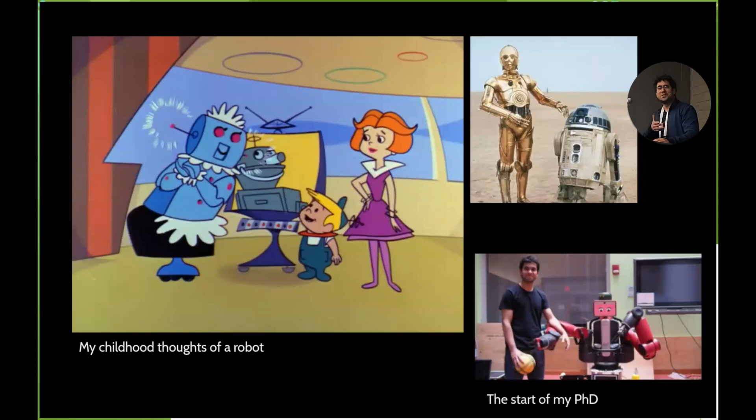This is the robots I grew up with. This is my first robot as a PhD student, the Baxter. Not the greatest robot, but it's amazing to play with, easy to break and fix.

And this is years later with master students working at a deadline for ICRA. They were recording to show their family that it was finally working. This is 4 a.m. at the deadline, I am dead asleep, laughing because they're making jokes about the theory. At 4 a.m. they were recording to show the family, and it's Bavaria, so it was actual beer.

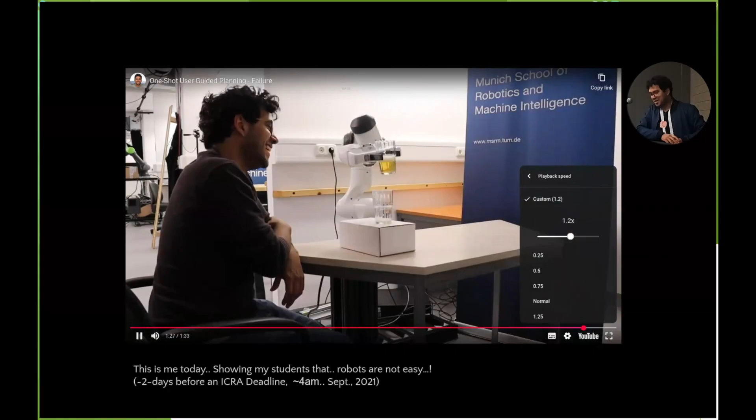And yeah, it's just to show that when you come to physical human-robot interaction, it's not that easy. Human-robot interaction, then you add the human part, and you make it a little bit more difficult.

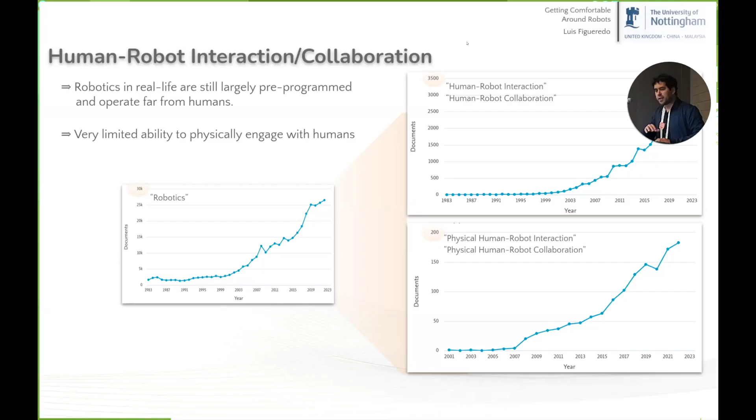So where does it come from? It comes from the fact that it's a completely new field. When you compare with robotics, these are the graphs for robotics, and you can see the numbers on top, talking about 30K papers per year nowadays. And I'm sure this data is 2 years old, so it's way more than that now. When you come to human-robot interaction, we're talking about something that just started in the 2000s, and physical human-robot interaction about 15 years ago. So we're still in the early ages of the field, and getting everybody to join because it's a very exciting one.

So how do we make this connection, how do we make robots more reliable so that those scenarios don't happen? Don't draw beers on your supervisor, that's a start.

So the basic features, the safety layer. When you talk about safety, the first thing that comes up, of course, is cognitive safety, there are many aspects of safety, but the most critical one is physical safety. So what happens if you have a collision? This is well known, decades of years of collision studies, hundreds of years of collision studies, we know that there are 2 phases that we can control.

We can control the pre-collision phase, which is basically like imagining yourself driving a car, what you do is brake. This is one of the scenarios we could do. With manipulators, I'll show that we can do a little bit more than that. During the collision phase, it's just transmission of energy, that's where your car crashes, there's nothing you can do there. But there is something you can do after the collision.

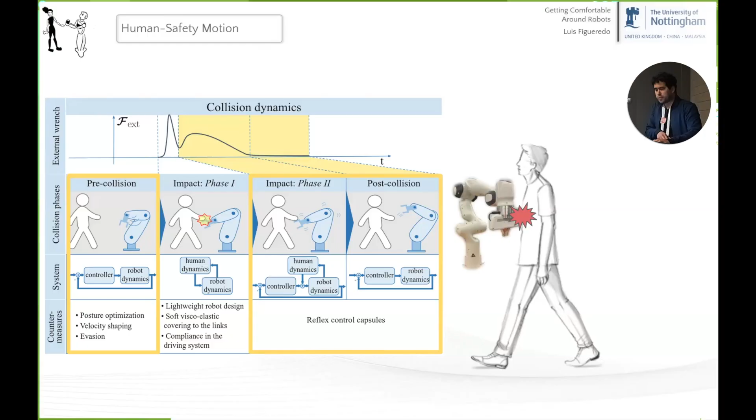So I'll talk a little bit about those two. In the pre-collision phase, what I was mentioning, velocity shaping is the most standard approach. You just reduce the velocity, you reduce the energy. That's very trivial, and of course it depends on the material you have, the curvature, whether you have a knife or rubber around you, that's completely different.

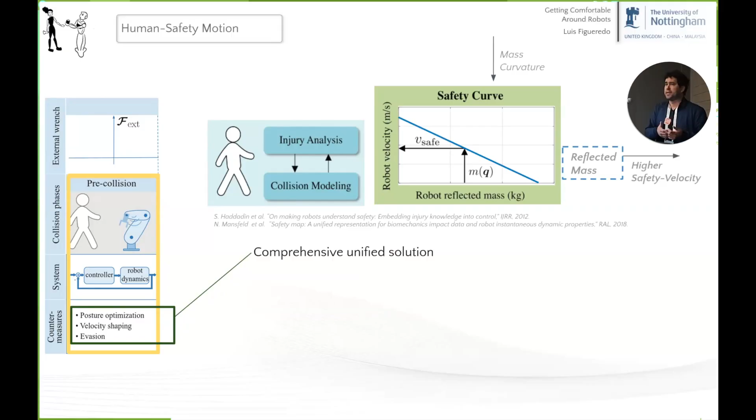But the other thing you could do is adapt the reflected mass. Think about yourself as a boxer. As a boxer, you try to maximize damage, so you have a behavior, a posture that maximizes your reflected mass. As a robot, you want the opposite of that. You want scenarios where you have lower reflected mass, because if you have lower reflected mass, you can have higher velocities.

And this curve in the top right is just a reflection of that. If you consider what are called safety curves, without going into too much detail, it's basically the relationship between the velocity you can have that is still safe, according to the reflected mass that you have. Here you can see if you have a lower reflected mass, you can go faster.

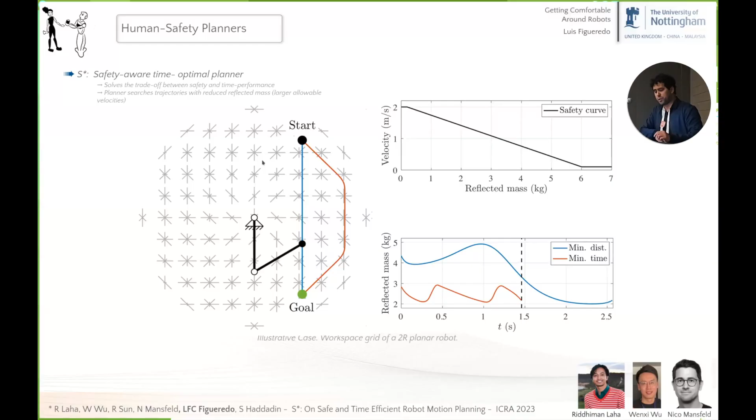So we embedded that into different planners. This is just an example of a modified A-star, that instead of having the heuristic based on distance, we have the heuristic based on time, the transition time, the safety transition time.

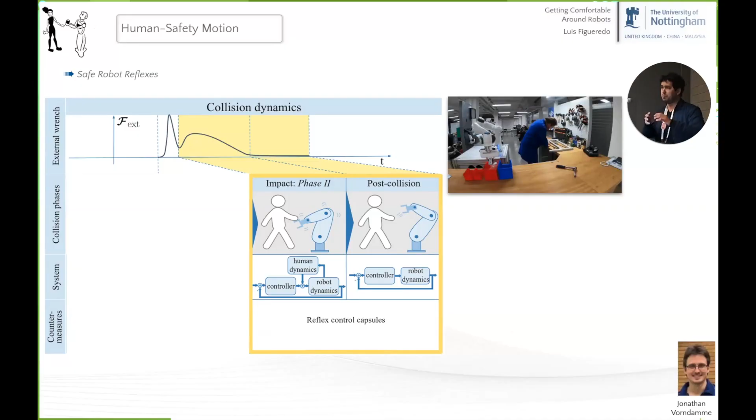Now I'm going to talk a little more about the other side of the challenge, the post-collision phase. Here we'll talk about reflexes the robot can take. This is an example: there's a collision, the robot contacts the person, and it triggers this super zero-G behavior that removes all the reflected mass from the robot.

So here, what we did first was design a taxonomy. We looked at previous studies and mapped out different scenarios in human-robot interaction that could cause safety issues, building up a massive taxonomy involving objects, the human, collisions, contacts, and objects in the scene. With that, we can define what kind of reflex we can play with.

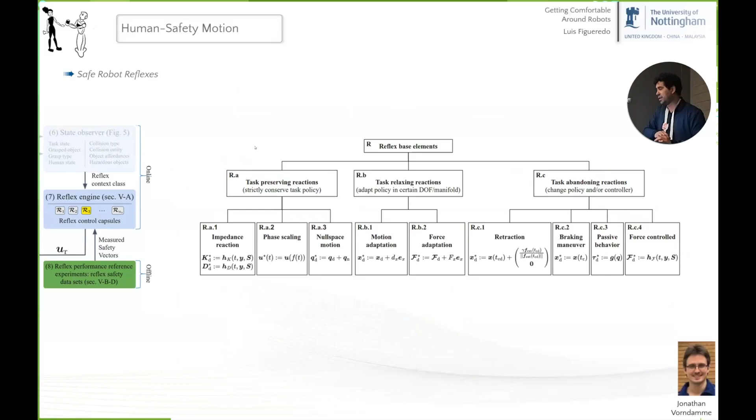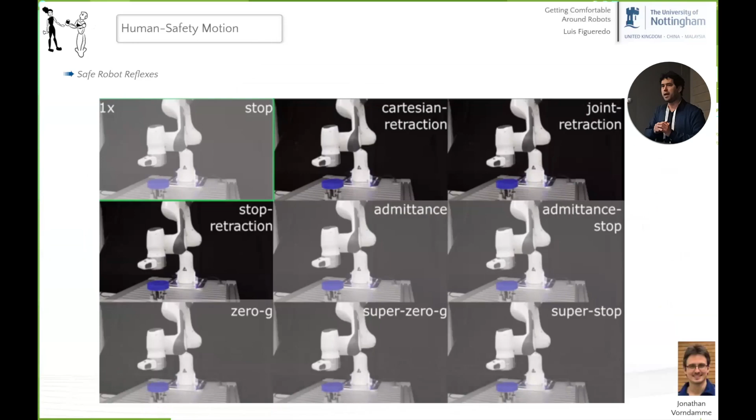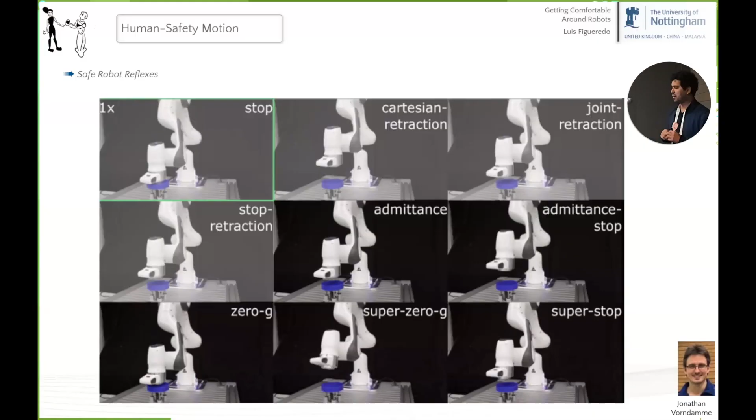And for the reflex, we also experimented with different reflex agents, so let me go into a bit more detail. Here you can see roughly three categories and the behavior they have whenever they collide with sensorized objects, a device for measuring contact forces. You have stop collisions, active retraction reactions, which could be Cartesian, joint retraction, or a combination of them, and methods involving back-drivability with admittance, combinations, zero-G, super zero-G, and different combinations of those. You can see that they're quite different — here they are in slow motion.

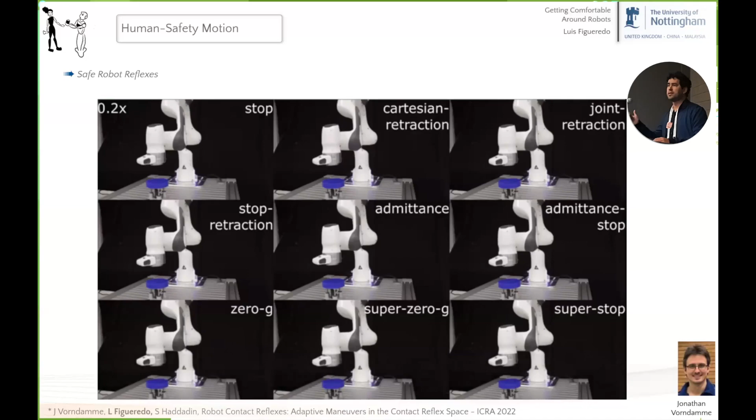Here you can see some features that are different. The forces are different. You can clearly see that the velocities after the contact are different, and the distance they travel is also different. We also investigated secondary collisions.

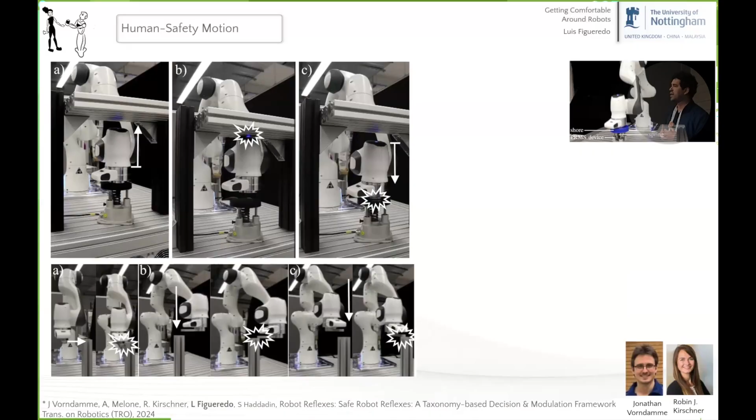So whenever you collide with an object, what happens in the second stage, and what kind of forces are transmitted. We took all these features and consulted experts in safety and biomechanics, colleagues who have worked on different topics in the area, including in vivo studies, to evaluate the different kinds of hazards you can have.

So we evaluated, for instance, clamping, and what features are related to the damage a clamping could cause — the maximum force at the point of contact, the distance traveled, the secondary collisions, and the velocity the robot and the reflex agents have during those secondary collisions.

And now you can look at them and very easily decide. It's a decision tree that you can say, oh, those are not good, I can use those for that specific scenario. And here's roughly what you got.

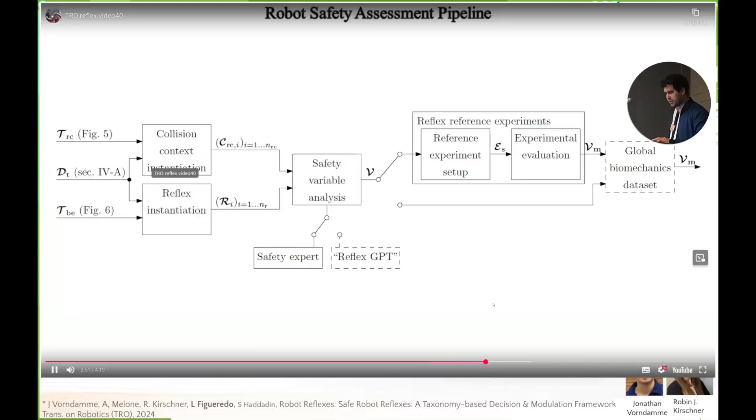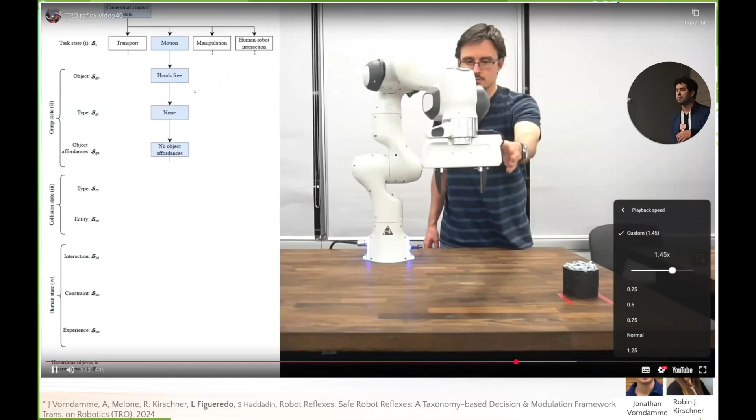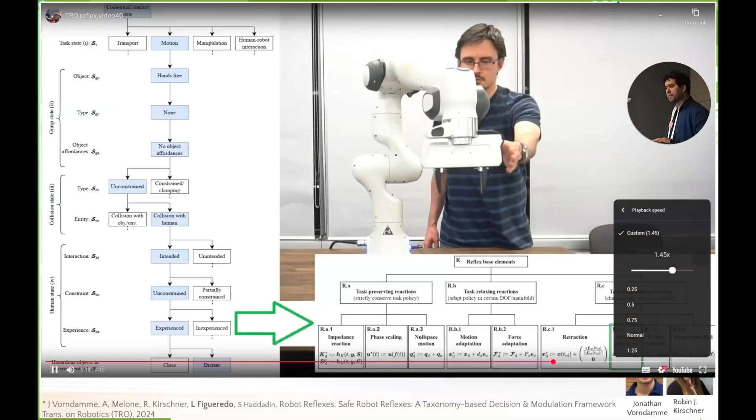This is a very simplified scene where we have some contacts, so I'll just speed it up to make it easier. Here you have some contacts. You go on the taxonomy, evaluating, and here, naturally, stopping is a very safe criteria. Stopping is the standard one, it's the one that is certified, and it's the most commonly used one. I'll just show why it's not ideal.

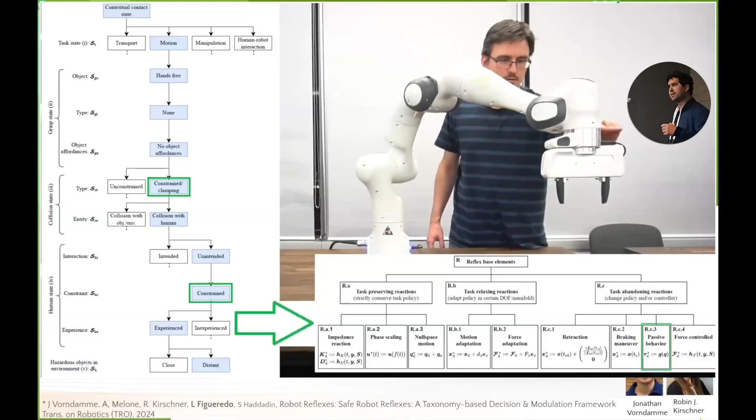So you have a secondary collision now, which stopping would cause clamping. And this is the taxonomy. Now stopping is not a valid condition. Super zero-G instead is a valid one, so the robot becomes super light and the person can move.

In this case, a stopping criteria is again okay to have because there is no chance of clamping. All the reflex elements would also be safe for this scenario.

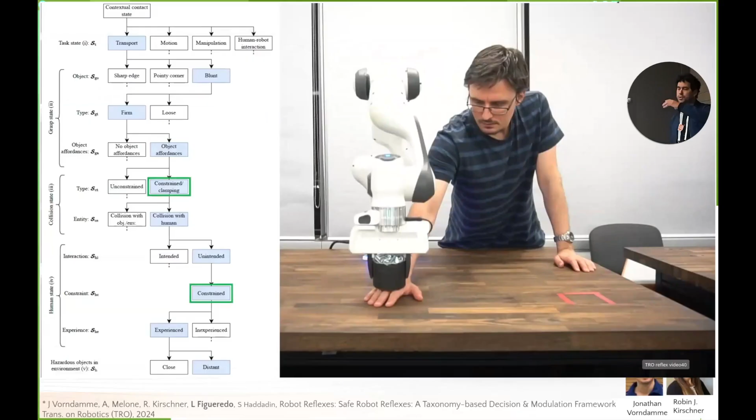And finally, there is another scenario, but this time we cannot activate the super zero-G that we had before. The robot cannot just go flying around because it has objects, it's carrying something that could be a hazard. So now we have a hybrid condition, could be an admittance controller, but this is a hybrid impedance controller. This is the kind of behavior you want to have to ensure human safety.

But now, you can ask if this is indeed safe, and I'm just gonna make an anecdote so it's clear - I'm Brazilian, so I go to football. Whenever I show this, I always tell how, a long, long time ago when we had an amazing team, we had a manager who told our best player, in the '58s against the Soviet Union, this is the plan: you dribble the first, you dribble the second, you go around the corner, you score, you touch the ball, you score. And the answer of the guy was, great for the manager, but have you already talked to the Russians? It's just like that - someone needs to talk to the robot, right? Otherwise we have an amazing plan and this kind of behavior.

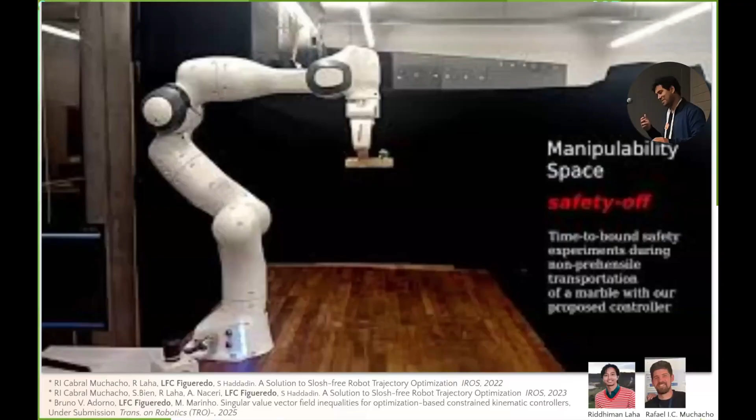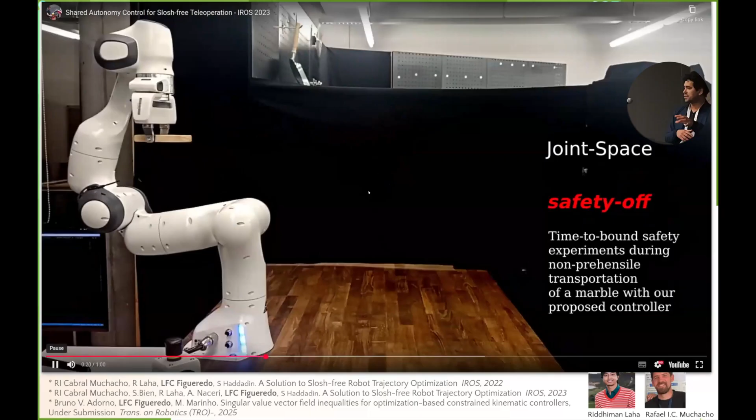Which, yeah, it's not ideal. So we need to embed those safety features in the robot. The robot needs to behave exactly as it is intended to. And these are the safety features that you embed in the robot, the most critical ones, of course.

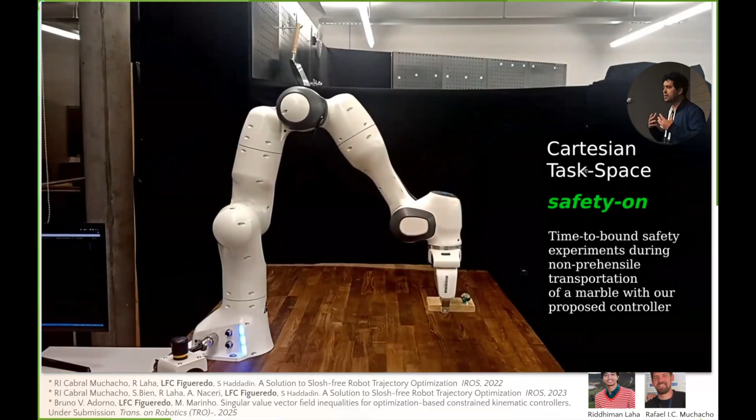You have the joint features that need to be there, so the Cartesian space constraints that need to be there as well, and manipulability constraints that need to be there. So all those are safety guarantee features that need to be there such that the robot can actually be safe. Otherwise, you can have the perfect physical safety guarantees, but if the robot doesn't behave safely, then what is the point?

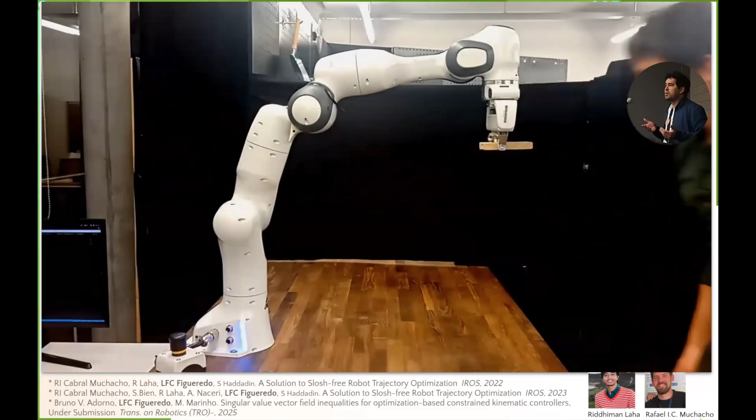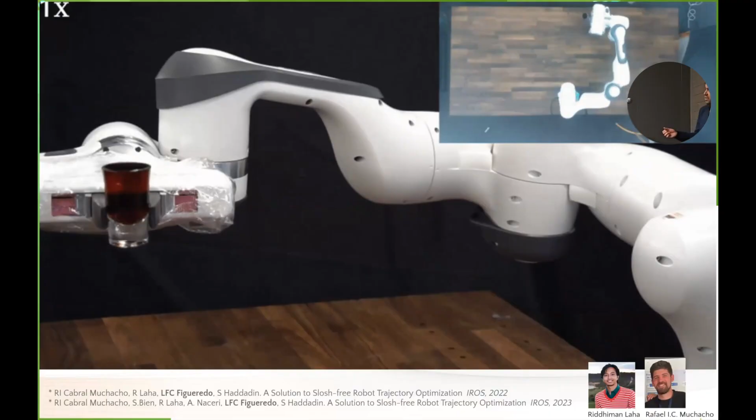So we took those concepts and moved to kind of a play scenario where we are looking at what could be extreme. One of the hardest challenges in robotics is carrying liquids, right? So how can you make those scenarios feasible? You really need to have precise manipulation. You really need to have controllers that guarantee the conditions we are planning to have.

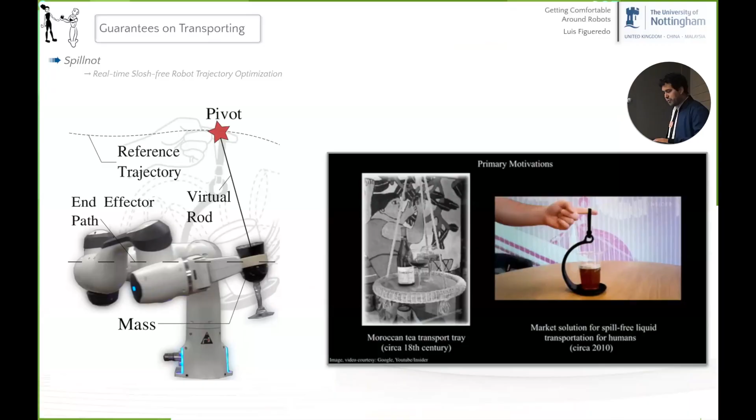And this is basically emulating a spherical pendulum. This comes all the way from 300 years ago, Moroccan tea tray devices - we just modeled the robotics like that. And we ensure the robot has amazing behavior to behave like that, so it doesn't drop any liquids, because it's all model-based, and these safety layers need to be model-based because they need to have formal guarantees.

We embedded - these always running at 1 kilohertz - an MPC controller. It's basically a controller under constraints as well, and the time-bound constraints basically guarantee that the dynamics of the pendulum that we have are also matched by the dynamics, the constraints of the robot that you have.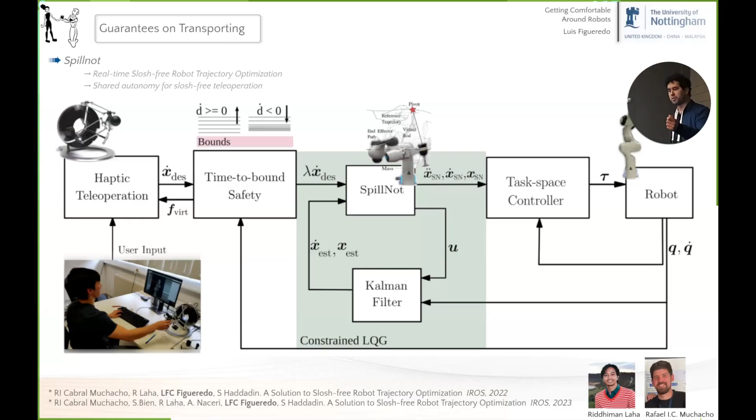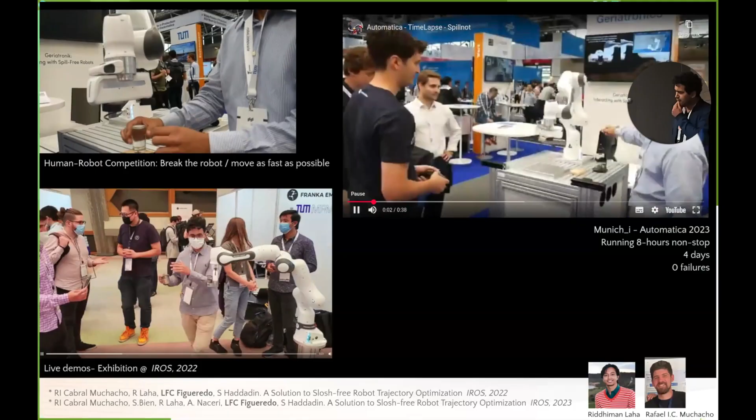And with all this running in a loop, we let people play around. So this is at IROS in Kyoto, and you give the cell phone to control the robot, and you're asking people just to break the robot. And this is a cool thing that the safety features need to have.

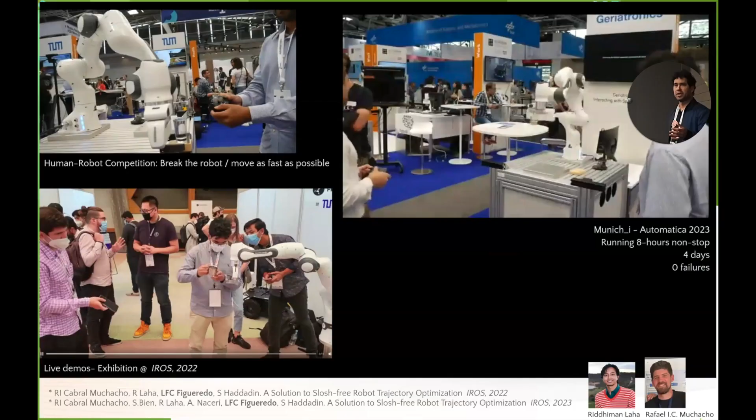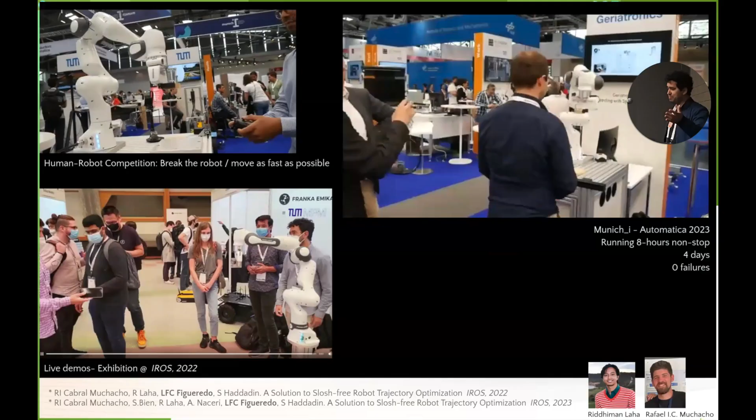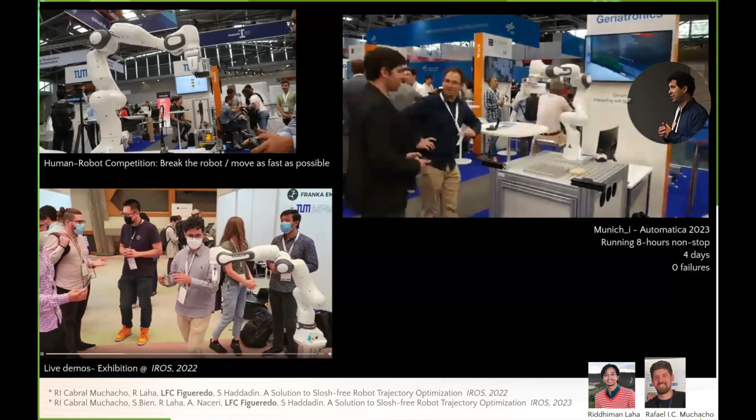You need to ask people to break things, because this is where it cannot break. In all those scenarios, this is in Automatica, in two different scenarios where you have like 40,000 people, you're just giving the Xbox controller for people to play and break the system, and giving it to kids to play or break the system, which is extremely scary. Kids are very good at breaking things.

And it worked, that's the main thing. So that's what we wanted to have in a safety layer scenario. If you have that in the safety layer scenario, then you can build up.

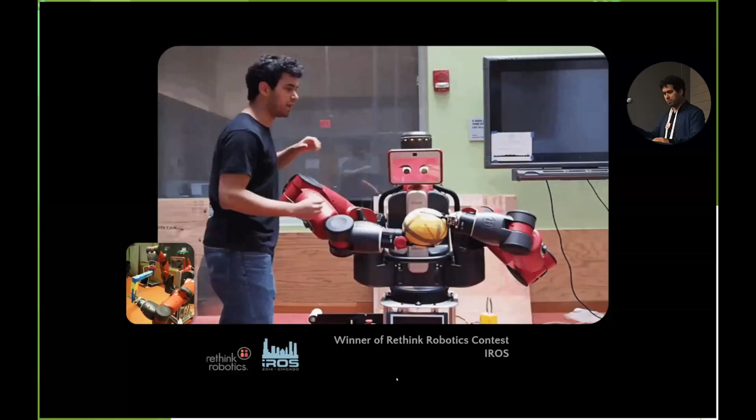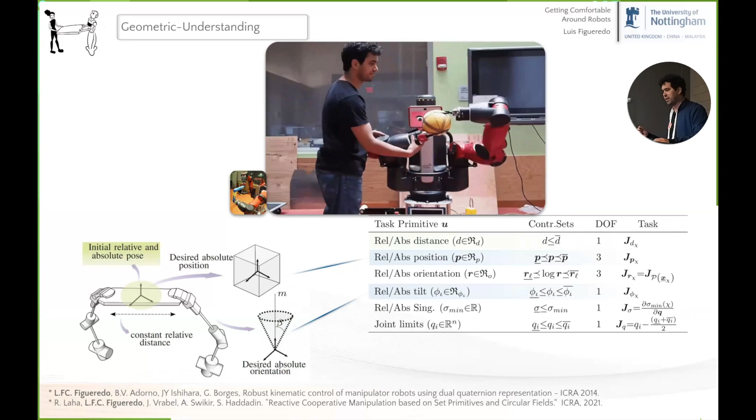So here I'll talk very quickly about the understanding and reaction scenes. This is basically me trying to break the robot as well, showing a little bit about the reactiveness that the robot needs to have. I'm just trying to drop the ball, and the robot needs to react instantaneously to adapt for it.

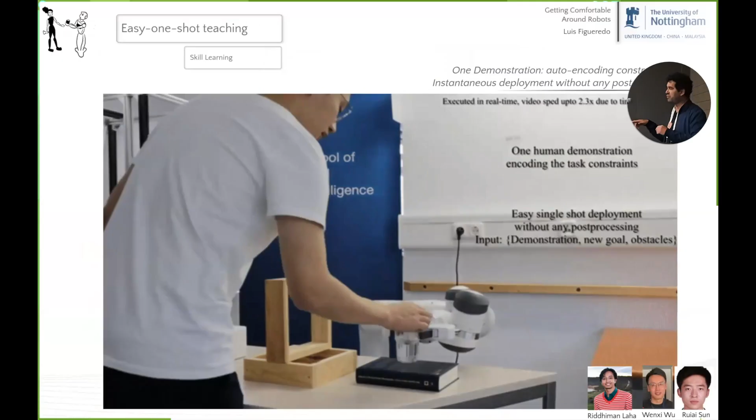This is the scenario of teaching tasks, again teaching one demonstration with all the safety constraints that we had embedded before. And this is the same thing where they dropped the beer on me, but now without dropping, ideally.

And extending to different scenes. I'll go very quick on that topic because it's not the main idea, but the idea here is basically that once you have the basic constraints, the basic feature, the layer of the robot underneath, then teaching becomes easier and much more robust.

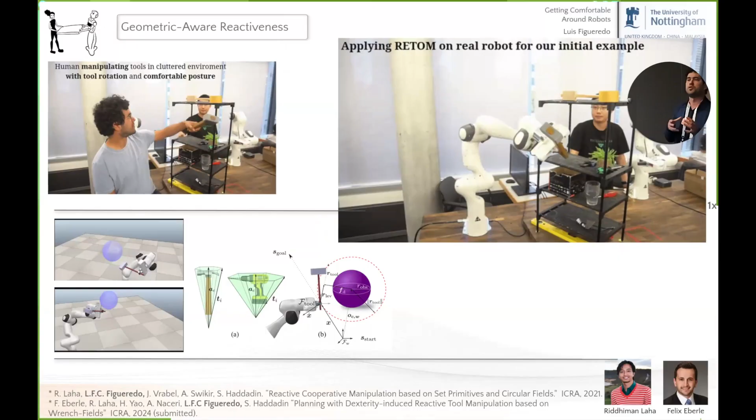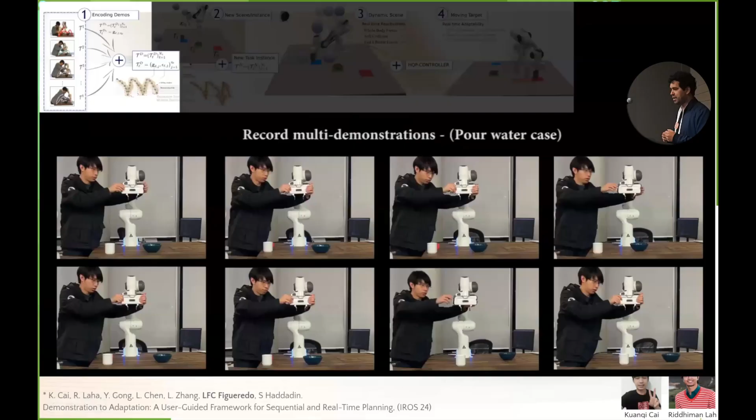This is an extension where you adapt also the reaction, the whole body adaptation of the robot in different demonstrations. But again, it's just the idea that if you have those safety features, then all this becomes much simpler to use and much more robust.

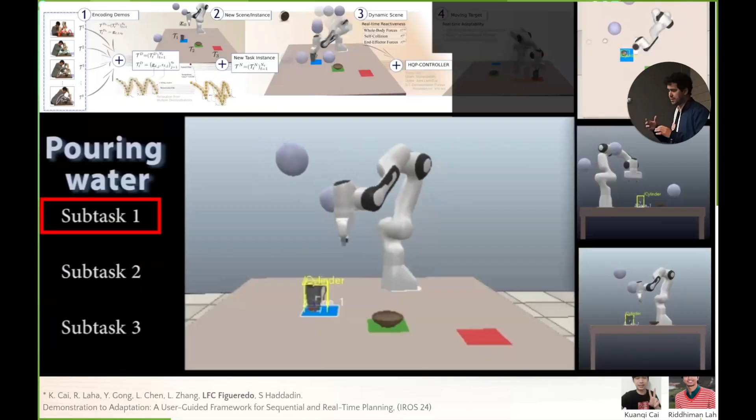And this is a whole body avoidance, while tracking and executing the demonstrated task.

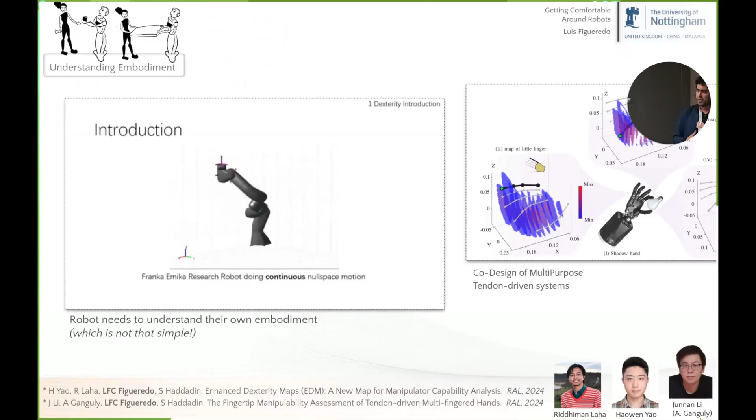I'm going to go in a little bit more detail on this. I just want to highlight why this is important, understanding the robot embodiment as well, because we need to understand the human embodiment and tools that we can use for one, we can use for the other.

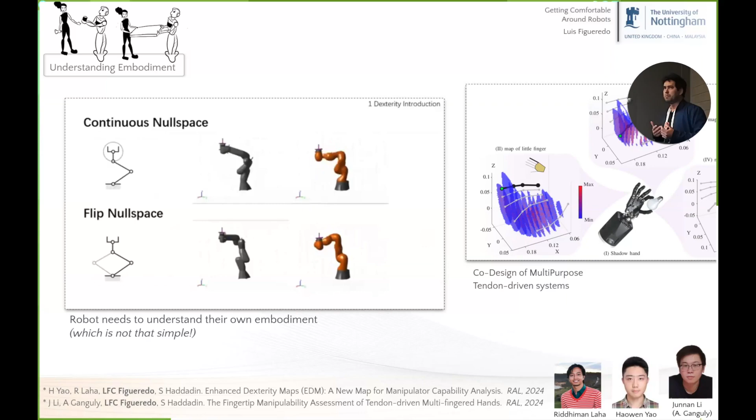So this is a study we are looking into on the embodiment of the robot, particularly switching between robots. If you have used, for instance, RRT, you know that sometimes RRT just takes completely different paths. One of the main reasons for that is because it has discontinuities in the null space.

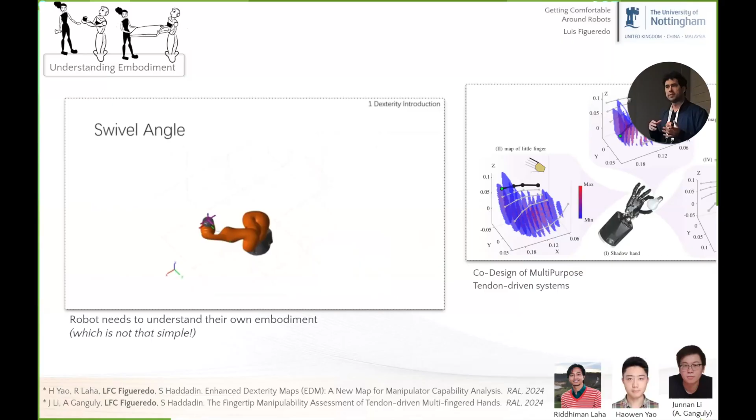So we evaluated not a 6D robot in this space, position and orientation, but an 8D scenario where we have the swivel angle and the switching between different parts, the discontinuous parts of the robot. We found that different robots have different ones.

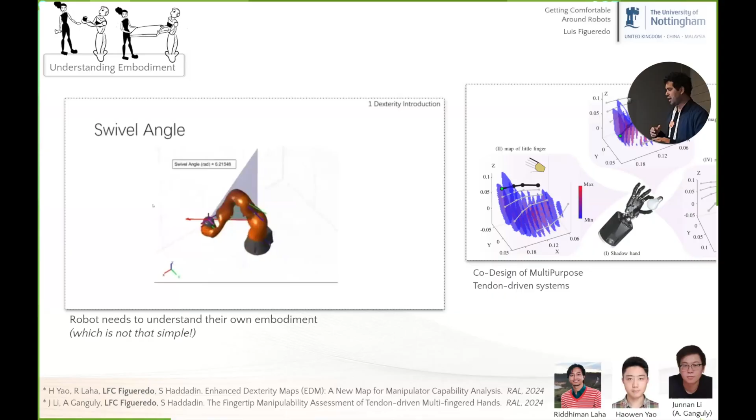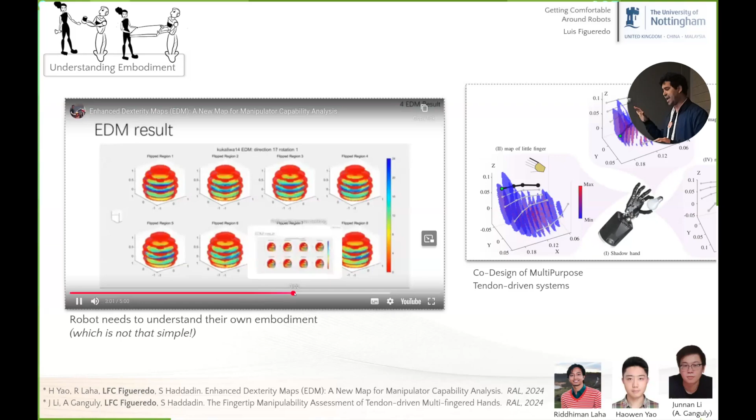I'll just jump here to what you see. So here are the KUKA discontinuities, which are continuous across 8 spaces that the KUKA has, and the Franka Emika has 4. So if you know about them, then you know how to switch between different parts of the space. And if you guarantee that your RRT is moving in a continuous space, the behavior will be continuous.

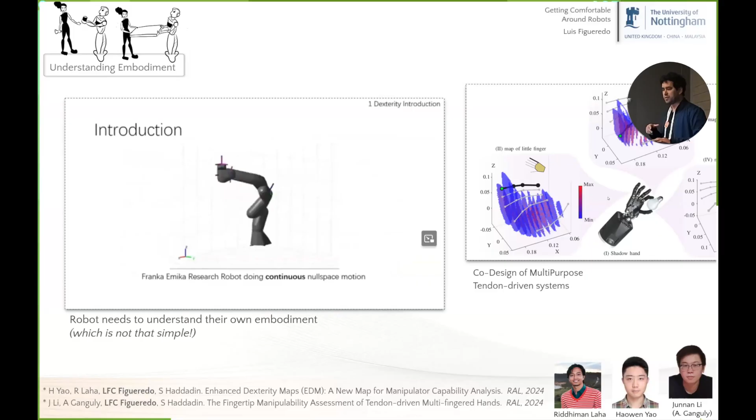I'll go into a bit more detail on that, but here the idea is that these maps, this information, can be used not just to build new devices, new tendon-driven devices, but also to understand human embodiment.

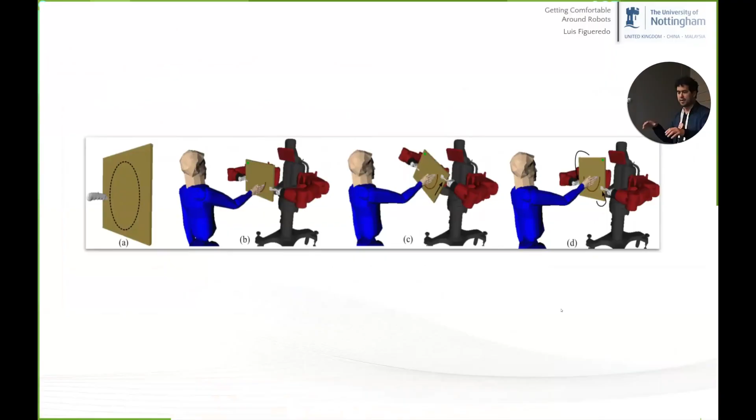All right, coming to humans now, you have all these layers set, and now you want to have like a complex task together with the human. So here you're doing a physical interaction.

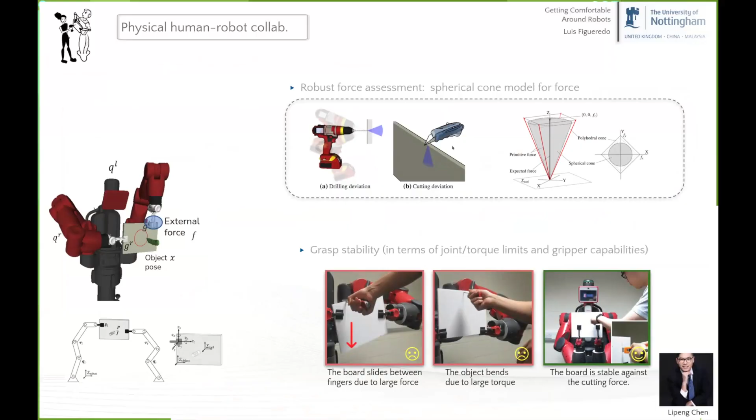You are doing a cutting scenario where we have a cutting scene defined. Here you want to minimize the number of your graspings. So you're just playing around, discretizing the task, figuring out how you're going to define this in a graph scene and define a grasp planner to execute it.

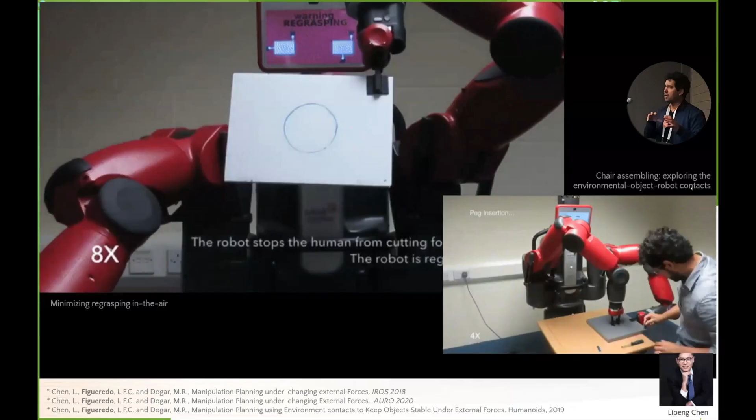And this is the scenario you got. You can just go quick on that, this is not the main part of it. But the idea here is that the robot, interacting with the human, tries to minimize the number of regrasps it needs to do to perform these two tasks. One is drilling and cutting a board, and the other is mounting an IKEA chair together.

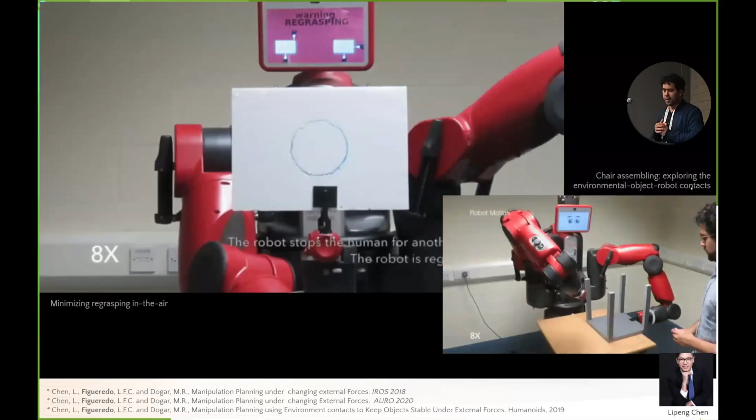It's a bit of a boring movie because it's basically the robot moving as little as possible.

One thing we got from these experiments is these conditions. Whenever I was cutting it, we were performing the task correctly, but basically my hand was always very bad, and the hands of all the subjects are all the same. Because we're looking at the task, we're not really looking at the safety, the comfortable side of the human—how humans feel about that. The task is being done, but not really nice for the person.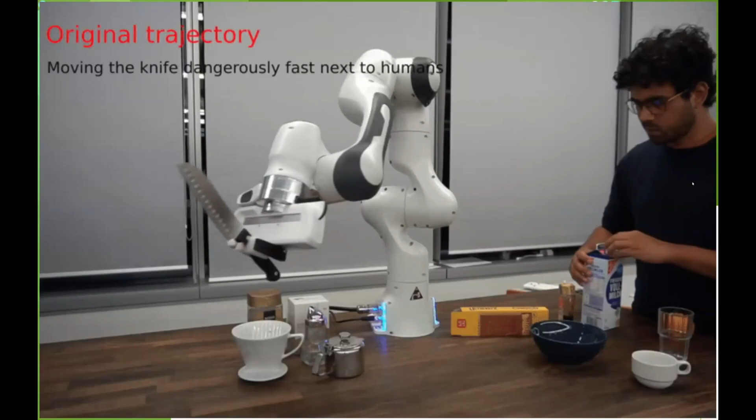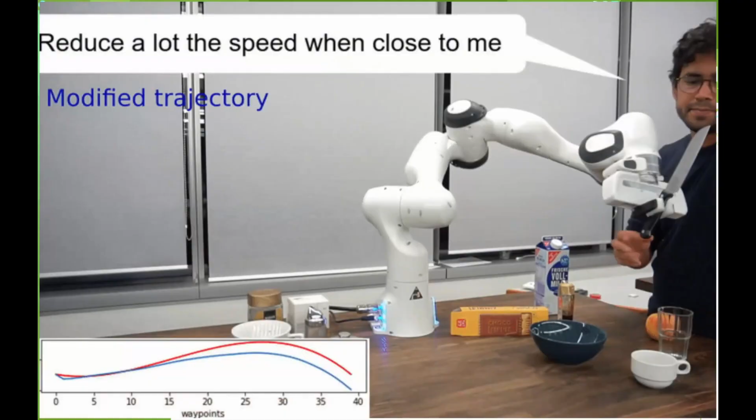So we embedded multimodalities for that, how we can get the features from the person and embed it to the robots. So naturally, like the most trivial ones, embedding natural language. How we embed natural language, again, in all the safety features that I mentioned before. Basically here we can modify the trajectory of the robot, still maintaining the constraints of the task and the constraints that are previously defined for the robots. Different embodiment, of course, that's not that hard. And having this adaptation in real time, which is the critical part.

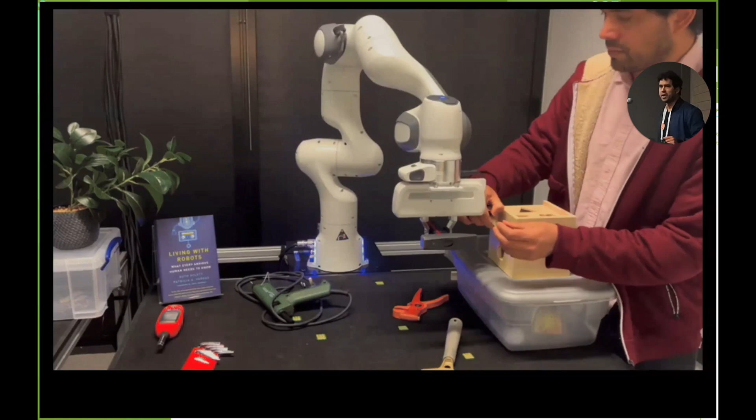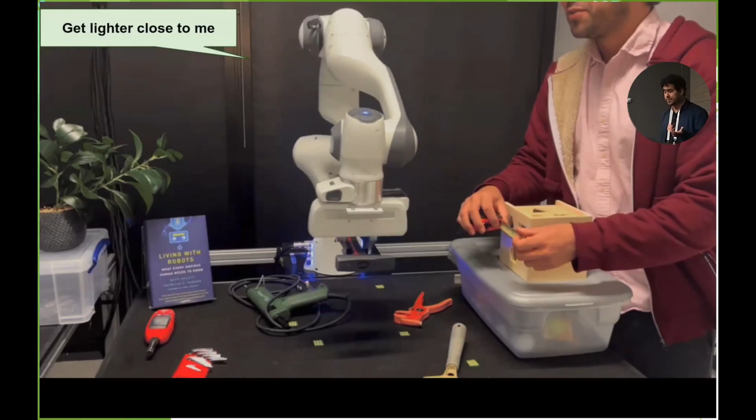This is just a model, I can go into details later. But you can also adapt that to stiffness and force interaction. And then it comes to safety. If there's a clamping, you don't have the time to go to your computer and say, please stop doing that. But you wanted the robot to not have this kind of clamping scenario, and instead tell the robot to get lighter when you're close to it. The robot will just change the stiffness with safety guarantees, with stability guarantees, with all the features that need to be there in the lower level layers.

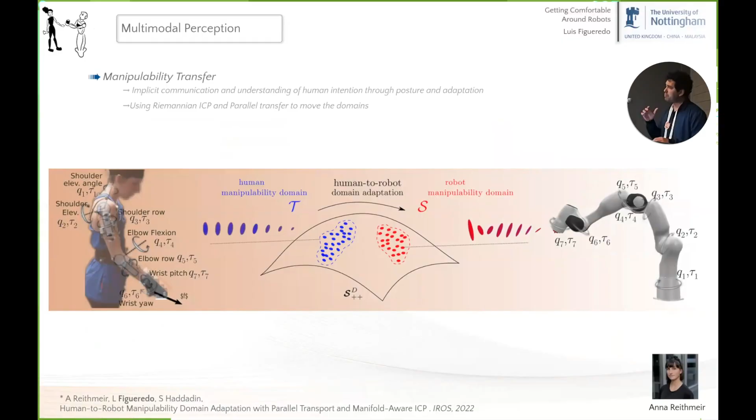Different parts of embodiment as well, so gestures, understanding. If you're pushing something, your body tells a lot about the task that you're doing. This is how you would do it—the embodiment tells if you're doing an easy task or hard task, a forceful task or not. And this is very critical for human interaction, in terms of understanding that, and in terms of mapping that information from one system to the other—how you map that from the robot to the human to the robot.

This is just a very quick example as well. I'll go quick on that, but this is basically one demonstration—it's the same demonstration, but one is basically a pushing task, the other is wiping. So there are different tasks and different embodiments because they require different forces. If you're just doing a visual demonstration, you don't have information about the forces, but you do have information about the embodiment of the person. And you can map that information and transfer it to the robot.

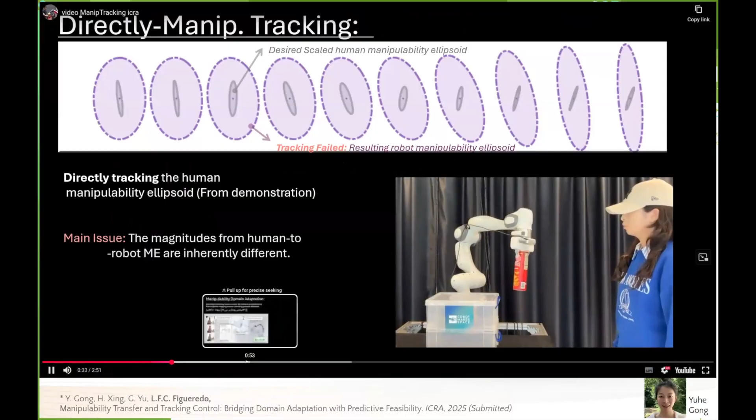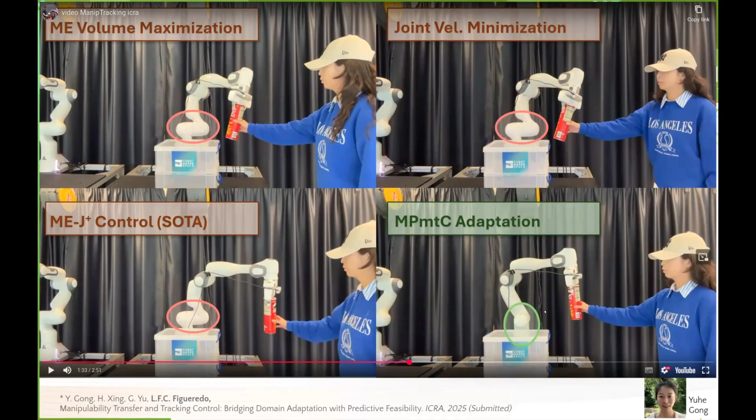In the end, what we get is scenarios—I'll just speed it up here. These are scenarios where, if you look at the lower joints, without demonstrating, just looking at the 3D task, the robot is able to adapt its posture in a way that makes it easier to execute the task, because that's how it was demonstrated. So the embodiment, the transmission of forces and velocities, are embedded in the demonstration and given to the kinematics of the robot, which can now adapt to that.

So this is very important, integrating those aspects, and of course integrating, as I said before, ergonomics and biomechanics. So how we embed the biomechanics information—here is a very simple example.

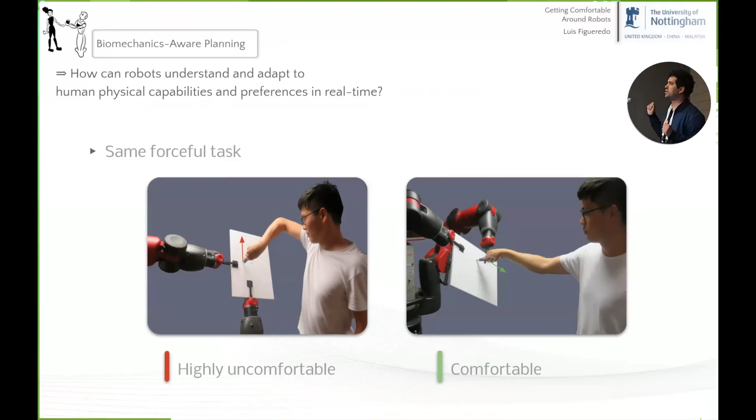Here's a very simple example. The same task—exactly the same task—but in one case the robot is positioning it for just a longitudinal cut in the board. In the other, the robot is placing it in a way that requires the human to execute the task very uncomfortably, while in the second one it's changing the orientation of the board, making it much easier for the human. So the robot knows the task, we know the task—it's just how the robot reasons about the task the human is going to execute. When you do human-human interaction, that's kind of natural; you want, as I said, to find a consensus between the two of you. But the robot doesn't know your body, so it needs to understand the embodiment to be able to do that.

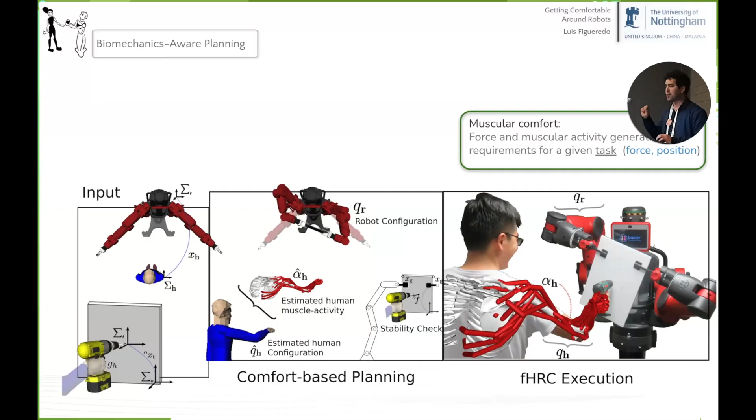So it needs to think about all possible ways you can execute the task, all the possible kinematics you can execute at that point, and all the possible muscle activity you can get at that point. Then you can execute the task in a way that minimizes muscle activity while guaranteeing all the constraints during the interaction.

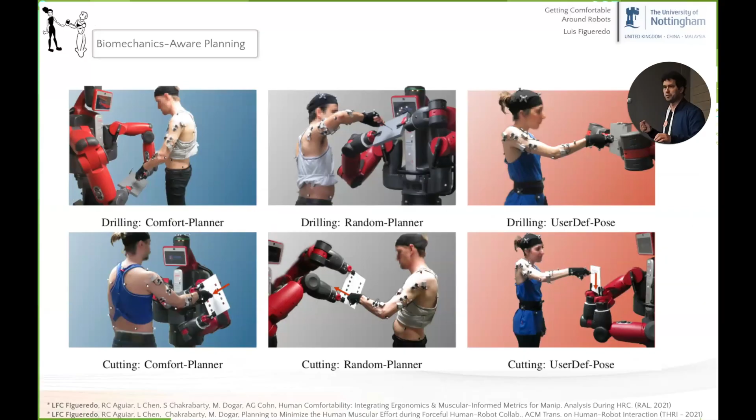So we did some studies comparing an optimal planner that minimizes muscle activity, a random planner where the robot just decides how it's going to do the task, and humans figure it out themselves. The last one, in red, is where we ask participants to manually pose the board where they feel comfortable interacting, after playing with the robot and getting acclimated to it.

Even compared with the user-defined one, we saw reductions of 70% of muscle activity in the main muscles required to execute those tasks. That's because you're constraining the person to execute in an optimal, muscle-oriented way. But as I mentioned, this is quite time-consuming.

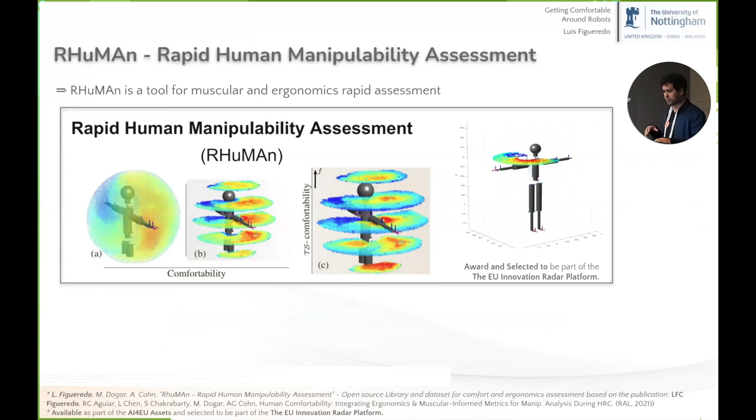It requires computing all possible kinematics and all possible muscle activity—that takes forever. So instead, we devised a pre-computing tool that computes all this information for you, calculating the ergonomics and muscle activity in different parts of the space. It's basically a lookup table at this point where you can grab the information you need—what's the optimal configuration for these kinds of forces—and the robot will be able to do it and give you the answer.

This has been done. We're executing a new version of it now that should be available in a few months—the Rapid Human Manipulability 2. Here we're integrating new spaces of the human, also evaluating the swivel angle, and integrating different kinds of human metrics—different joint limit configurations, biomechanically oriented joint limit configurations, dynamic manipulabilities, and so on.

The main thing here is that it's very structured data, and because it's structured, it's very prone for learning. We wanted to make it available for the public exactly so they can look around, play with it, and learn more about how we behave, so we can embed that in new configurations for human interaction.

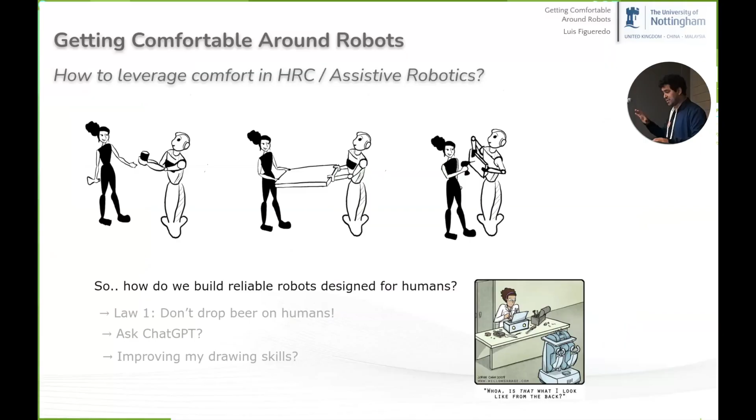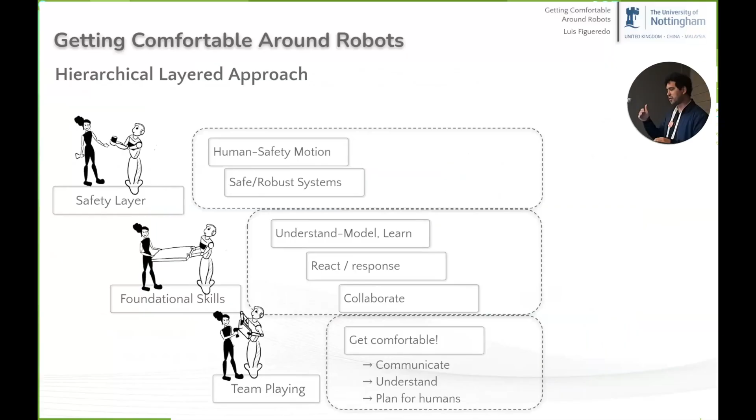But just to wrap up, given the time, this is my view on how we should bring the comfortable side into human-robot collaboration—this layered approach with formal guarantees all the way to the new features that we have, brought together in a nice way. I just want to thank all the students and everyone who did the hard work with me.

A few talks before were mainly focused on foundation models, right? I've seen one of your works using large language models, but more for instruction. Do you see that some of those components can be used in some of the layers you've been working on? And if so, which ones do you think?

I think so. Foundation models are extremely powerful, but I think it's Rodney Brooks who says we need to cut the tails. Cutting the tails means we need to constrain them to places—especially with human interaction—places we know work, and put them in safety boundaries. That means reducing the power they have a little bit, yes, but it means you have formal guarantees on them, and then you can deploy them safely.